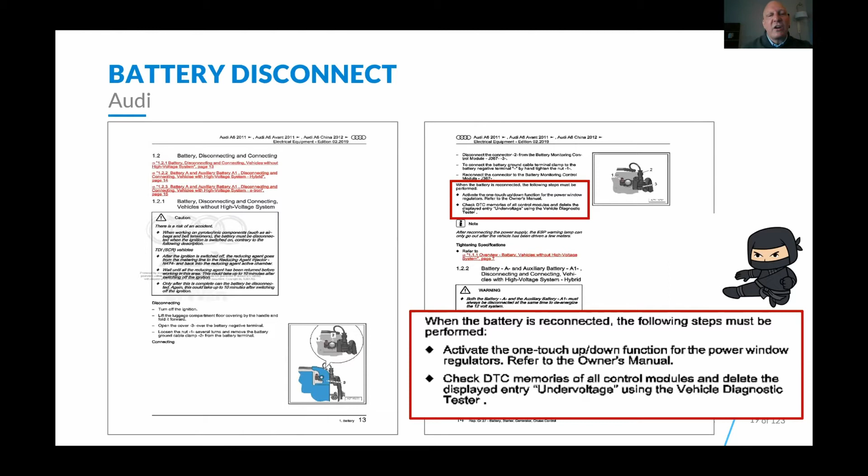Look what Audi says. When the battery is reconnected, the following steps must be performed. Activate the one-touch up and down function for the window. And check DTC memories of all control modules and delete the displayed entry Undervoltage using the vehicle diagnostic tester. Right there says I got to hook up a scan tool, and I got to clear all of the lost communication codes. And by the way, for those of you using aftermarket scan tools, you're not going to be able to do this. That's why you need to use OEM scan tools. So for those of you that have disconnected 1,000 batteries, did you know Audi has a very specific procedure? Let's look at General Motors right here, on a Chevy Cruze.

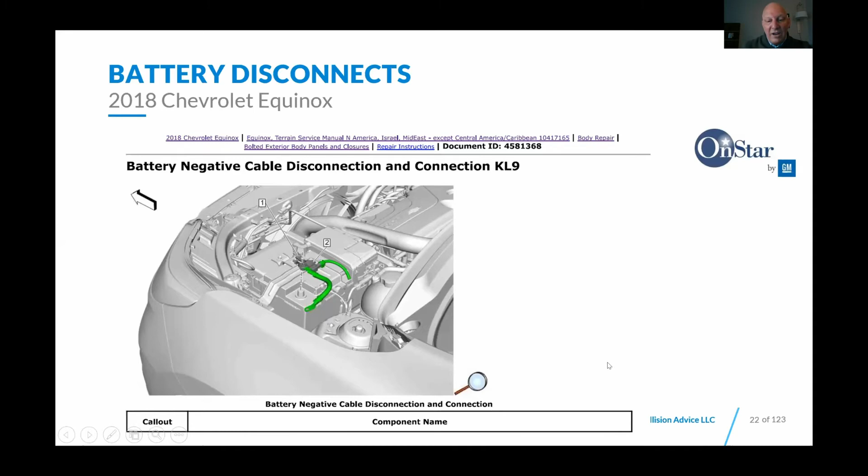Look right here. This is Chevy Equinox. Look at this one right here. Now, this one has OnStar on it, right? This Chevy Equinox has OnStar. And look what it says right here. It says if the vehicle's equipped with OnStar, there are certain things you need to do before you disconnect the battery so you don't trigger a call from OnStar where the vehicle owner ends up getting a bunch of emails saying there's a problem with your car. And if you don't do this properly, guess what? You might end up having to buy a backup battery because when you disconnected it, it goes to backup battery mode, right? So if the vehicle was in an accident, the battery got damaged or the wire got cut, it could still notify OnStar. So are you looking that up?

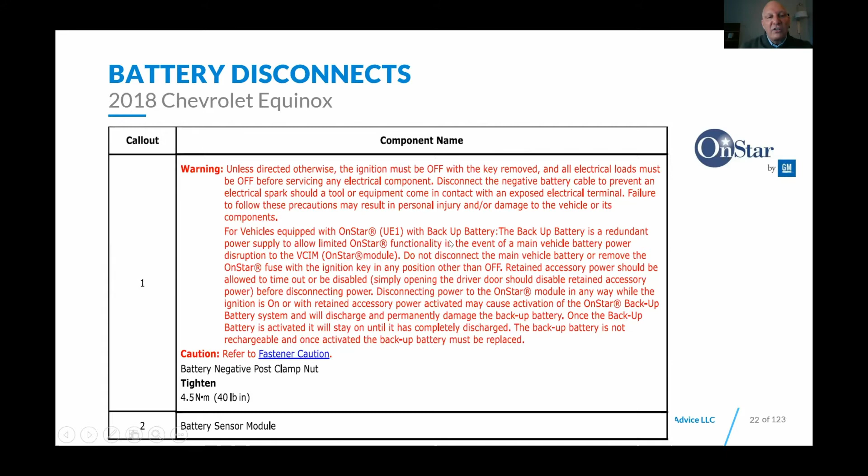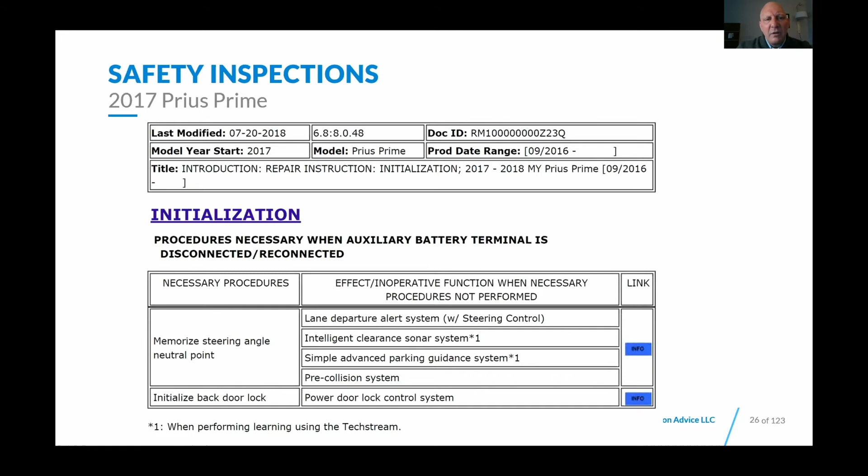But can you imagine how a body shop feels or an insurance company feels when all I'm doing is replacing a bumper cover and I got to disconnect the battery and I put something on my estimate and it says initialize back door lock. And now some insurance appraiser is wondering, why do you got to mess with the back door when all he gets is a headlight and a bumper cover? Because, ladies and gentlemen, it's what happens when we disconnect the battery. Here's what I'm trying to tell you. Even something as simple as a battery, which we have for years disconnected, reconnected, you got to research that.

Now, here's what I'm going to tell you, right? Ladies and gentlemen, we've got to start thinking about the OEM repair procedures like building codes. I'm sure that all of you are familiar. Like if you go to build a building, in Canada, Patrice, I'm sure there are certain standards you have to meet, right? Like you go to build a building and somebody has to come in and do an electrical inspection. If you're going to put a lift in concrete, your concrete needs to be 6 inches or thicker, right? If you live in Florida, the building code is you got to have certain types of windows that are hurricane proof. If you live in Montana, there's certain types of bolts and fasteners you need to use on a roof so it will support the weight of the snow.

Ladies and gentlemen, here's the deal. OEM repair procedures are the building code for what to do to a vehicle that's been in an accident. Think about building codes. They're to provide minimum standards to protect people in the case of a fire or an earthquake or windstorm or whatever. And they ensure the structural integrity so a building doesn't collapse.

Ladies and gentlemen, I got to tell you, first of all, I am very, very grateful to the people of Canada because when September 11th happened in the United States, so many people in Canada took Americans into your homes and your businesses because they couldn't get back across the border.

And that was a tragic day for us in United States history, right? But here's the deal. I can tell you that at the Pentagon, not as many people would have survived when the planes hit the Pentagon had it not been built to code. And ladies and gentlemen, we've got to understand that every single time we repair a vehicle, we have to return it back to code. And the OEM repair procedures are the standard.

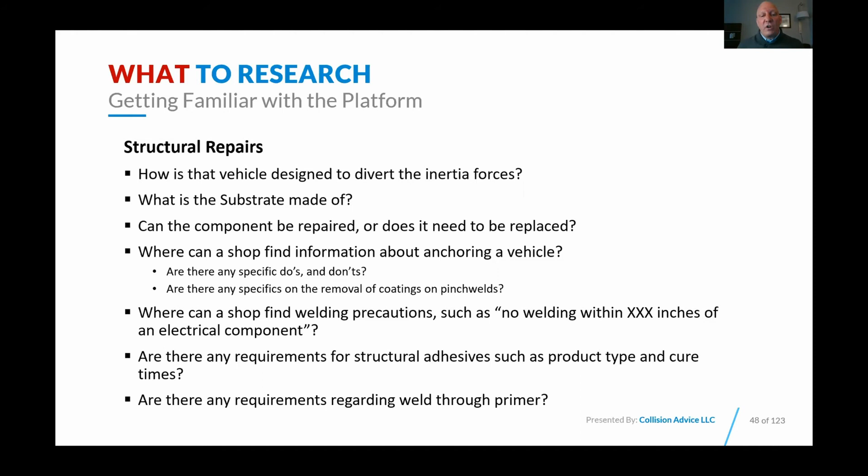And then I need to look up things like how can I properly anchor the vehicle? Do I need to remove all the undercoating and seam sealer off the pinch welds? We might got to look up any welding precautions, like no welding within 18 inches on a Toyota or Lexus, but no welding within 12 inches, which I think is 300 millimeters, on a Fiat Chrysler vehicle. We got to find out, is structural adhesive used anywhere? And if so, what's the cure time? And are there any requirements for weld-through primer?

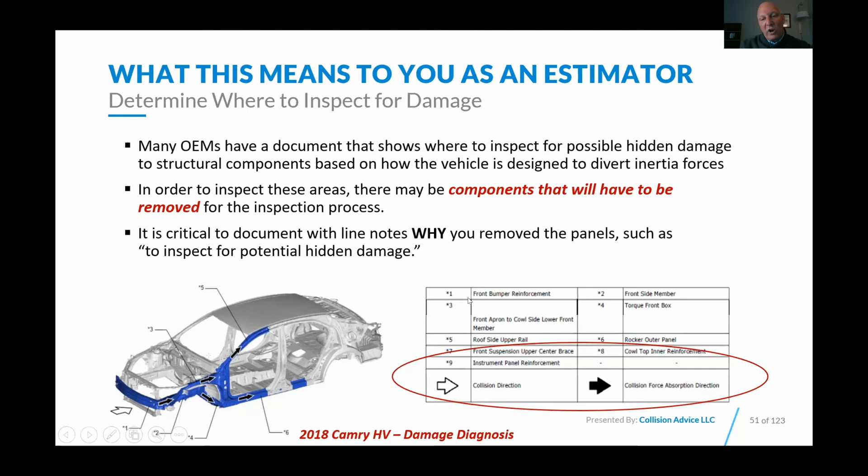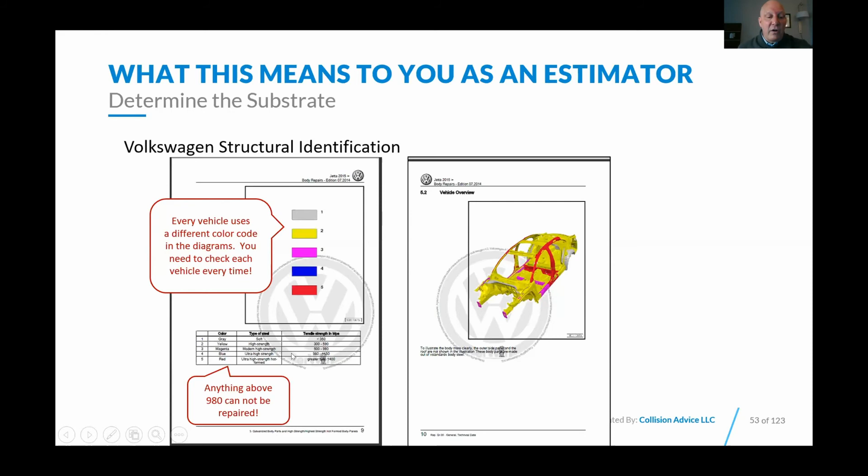All right, so now I go through and I find damage. The next thing I do is find out what the substrate is made out of. For example, I go into Volkswagen's erWin, it's color coded. Here's what every substrate is made out of. And I know I can't repair anything 980 or higher. So now I know I got to replace this. I can't repair it.

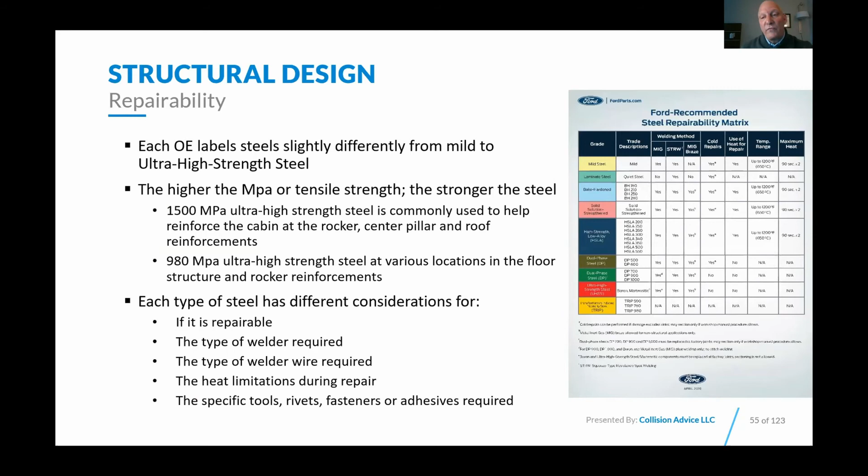So how do I find out if I can repair or replace? Some of your OEMs like Ford, Honda, and others are going to have these matrices. They're going to tell you if the part can be repaired or has to be replaced. And if I have to replace it, now I'm going to look up my sectioning procedures. So there's a whole thought process on how I'm using the OEM repair procedures, right?

Now let's talk about electric vehicles a little bit. Tracy, I know that you were an electric vehicle owner. You had a Prius, I believe, right?

Electric vehicles are becoming a growing market share. You must look up your refinish precautions. Look right here. I want to give a shout out to Scott with Audi up in Canada because he taught me this. Is there anything special to do when an Audi high voltage vehicle must be brought into the paint shop? Yes, it cannot exceed a certain temperature for a certain time in the spray booth.

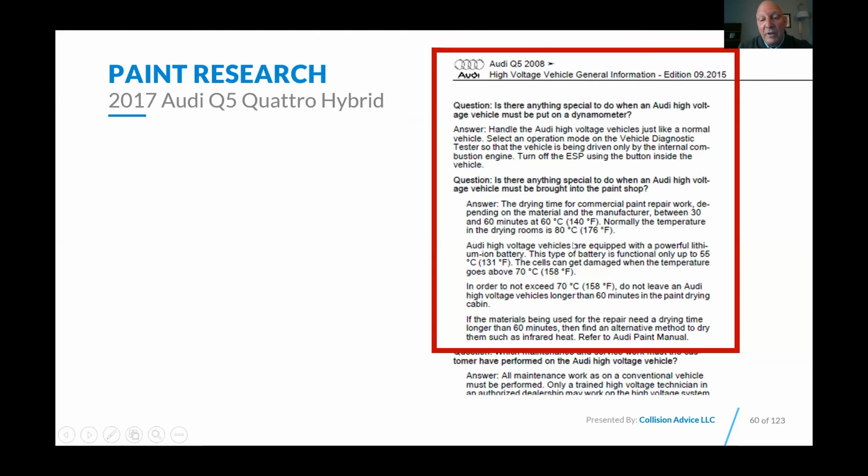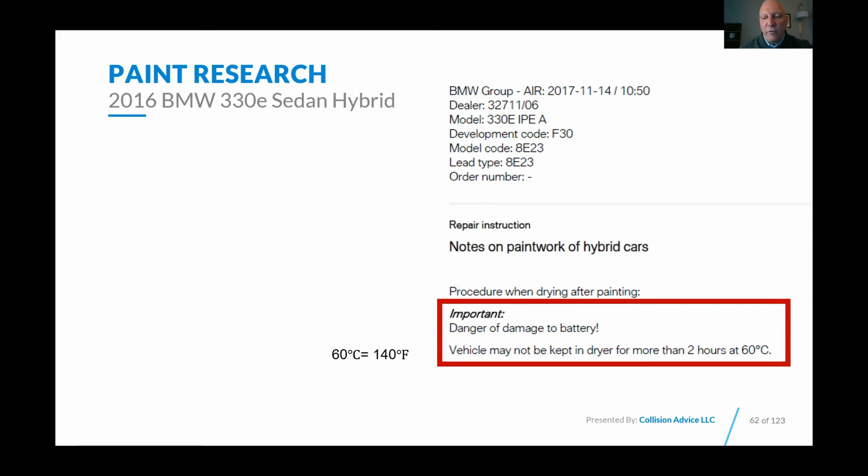Let's look at an Acura. High temperatures may damage the battery module. When drying paint in a heated paint booth, make sure the temperature doesn't exceed 65 degrees Celsius. Look at BMW: the vehicle may not be kept in a spray booth or dryer for more than 2 hours at 60 degrees Celsius. Look at a Chevy Volt: can't exceed 60 minutes at 160 degrees Fahrenheit or 71 degrees Celsius. It'll damage the battery.

So what I got to do is check the temperature on that, and I'm going to have to remove my rocker cover so I can actually check the temperature on the metal rocker panel. Here's a Porsche, ladies and gentlemen. They have a very specific cure time and temperature.

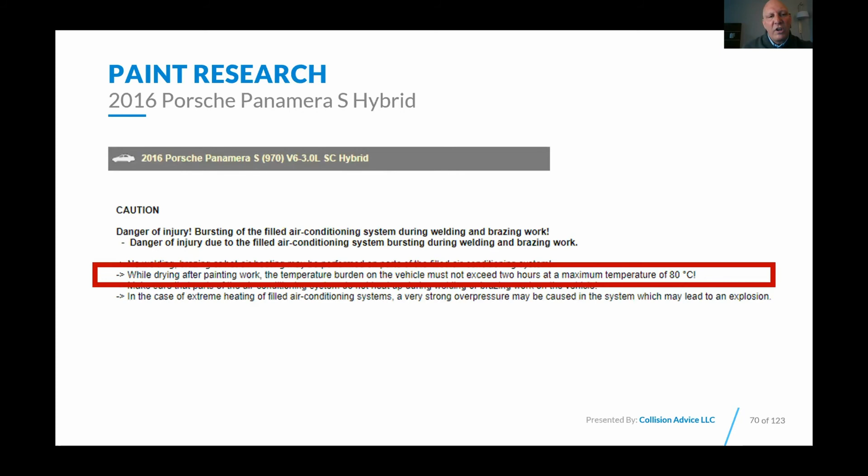Here's the next thing. Remember, I told you one of the biggest differences is between an OEM website and the aftermarket providers. You've got to know if the vehicle's connected to telematics. If so, you've got to place that vehicle in service mode before you disconnect it or take it apart, or it's going to send the customer an email.

Here's the problem — if you're using some of these third-party solutions, it will not tell you this. And if you don't place it in service mode, your customer is going to get email notifications. In some places, you may activate the backup battery, and that's a one-time use part, so now you're buying that. As more and more cars are connected, we're going to have to research OEM websites because we need to know this information. Let's talk about safety inspections.

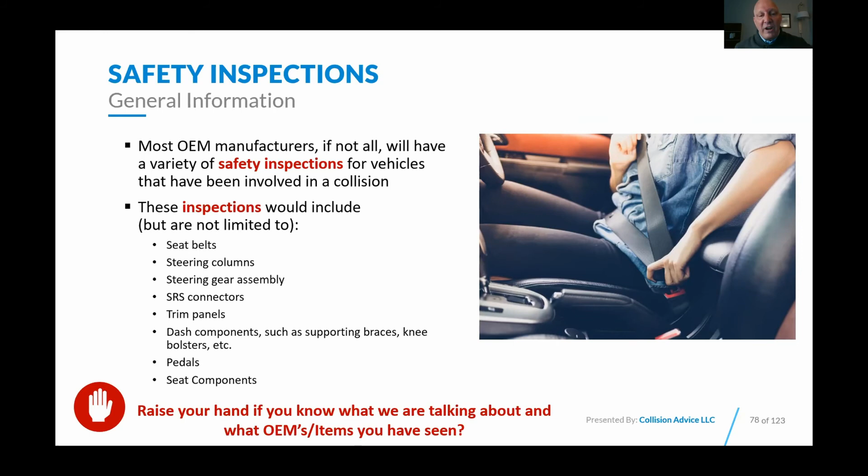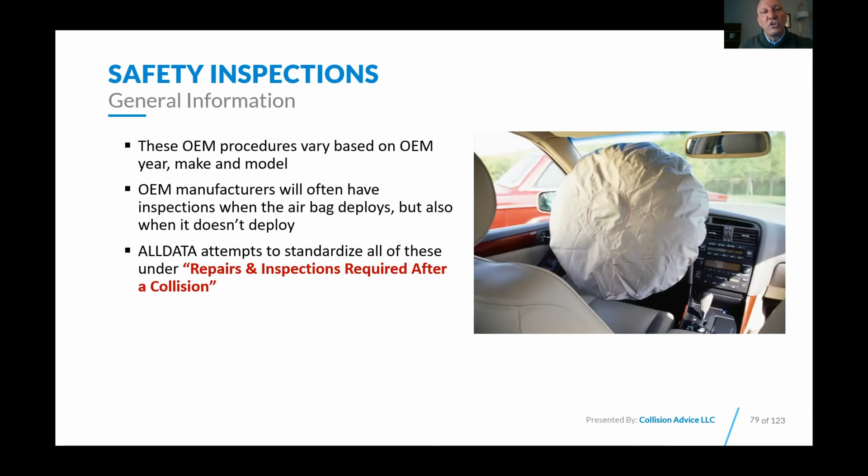Ladies and gentlemen, I can tell you right now if you were in front of me, I'd say give me an amen if you know what I'm talking about. Let me give you some examples. By the way, these OEM repair procedures for safety inspections will vary based on OEM year, make, and model. This is one of the benefits of using ALLDATA — it attempts to standardize this under repairs and inspections required after a collision. That's a good thing from ALLDATA.

Let's look right here, let me give you an example. This is a 2018 Chevy Silverado — these are actual pictures from a friend of mine, Tim Papp, who owns a body shop called Papp Auto Body in Illinois.

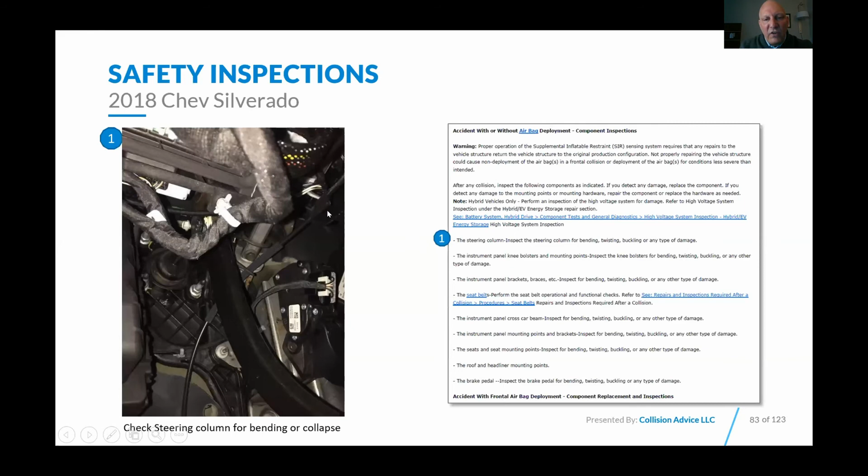When you research the OEM repair procedures on this Chevy Silverado, the first thing it says you need to do is inspect the steering column for bending, twisting, buckling, or any type of damage if the vehicle's been in an accident, even if the airbag did not deploy.

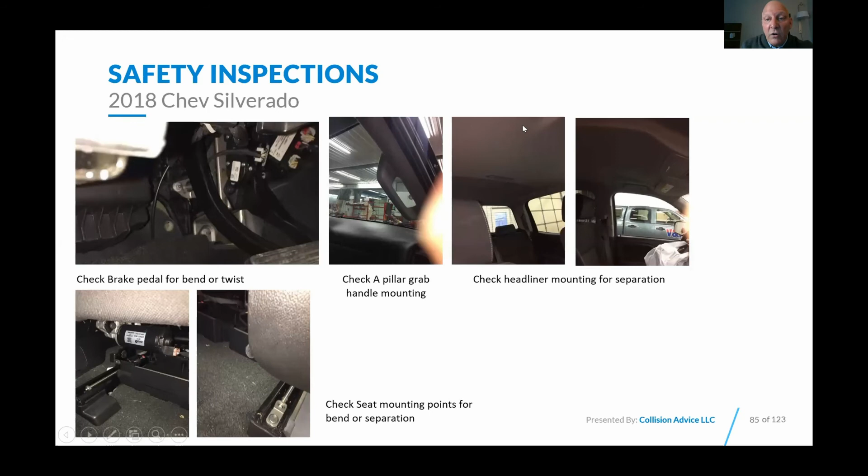What does it tell me I need to do, ladies and gentlemen? It tells me I need to check the brake pedal for bend or twist. It tells me I need to check the A-pillar grab handle. It tells me I need to remove the headliner and look at the headliner mounting locations. I need to look at the seat tracks. I got to look at the seat belts. And guess what else it tells me? It says I need to R&I the dash and inspect the dash carrier.

Well, guess what? It's a good thing Tim Papp did that. You know why? Because look right here, the dash carrier was broken. Think about if he would not have done that. He never would have found this.

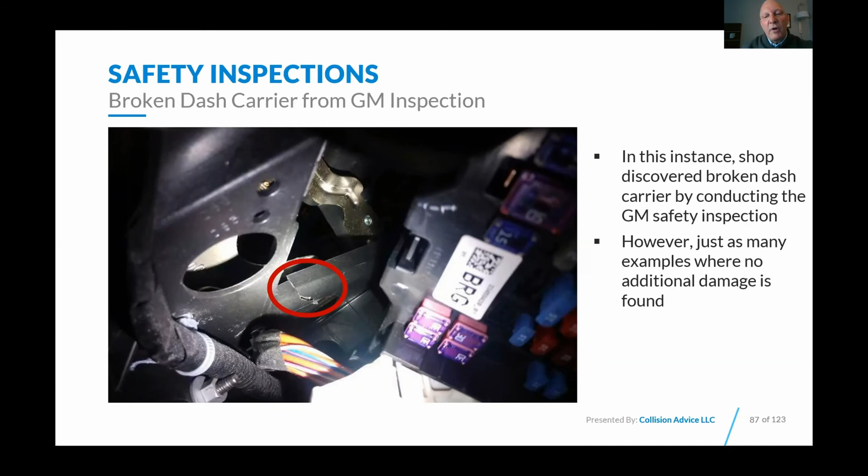And that's why I'm saying there's a pandemic in our industry that is greater than the coronavirus or COVID, and that's people not researching repair procedures. It scares me to think about how many GM products are riding around with broken dash intrusion carriers because nobody did the work.

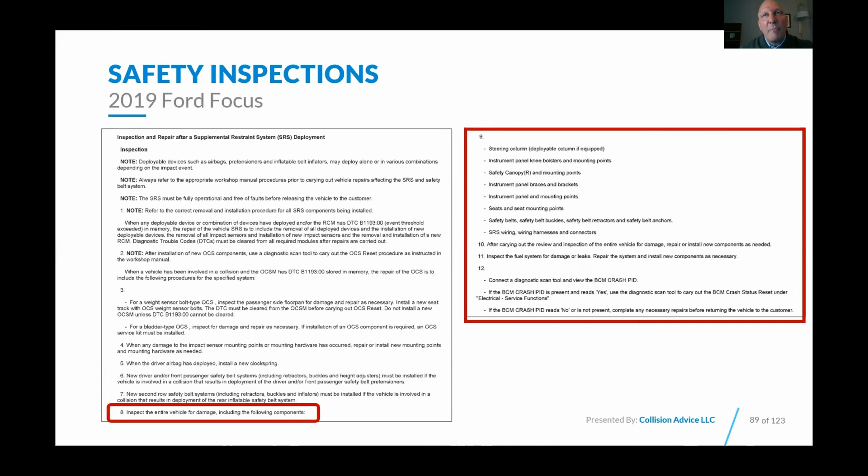Look at Ford. Ford says, look at all the things you got to do if a Ford is in an accident. It says if it's in an accident, even if the vehicle airbag does not deploy, you need to inspect all of these things. Mercedes-Benz has examples of things you need to inspect.

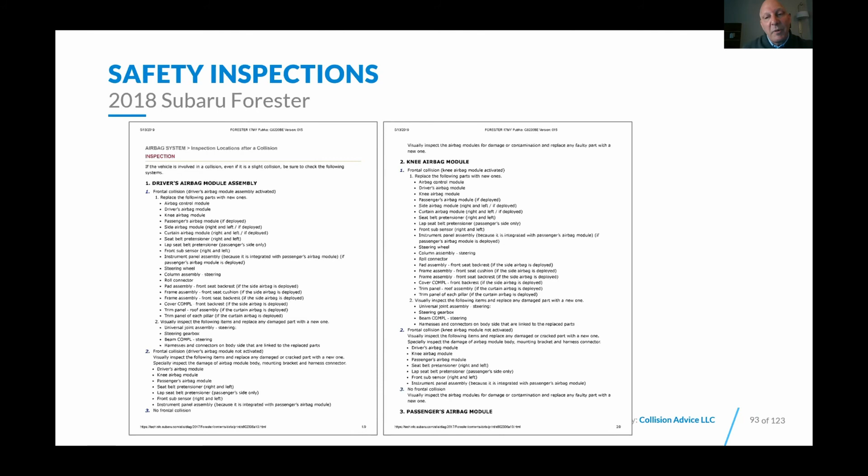Look at Subaru. Check this out. Subaru says if a Subaru's in an accident, watch this, everybody. Watch this now, stay with me. 1-page, 2-page, 3-page, 4-page, 5-page, 6-page, 7-page, 8-page. There's an 8-page document of things I'm supposed to look at and inspect if any Subaru's in an accident.

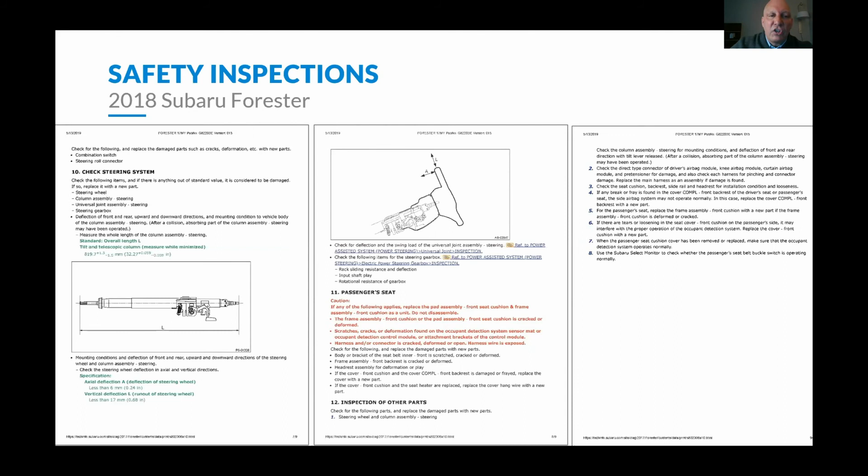And let me tell you about a little case study we did with steering columns. I'm going to tell you about that in just a moment.

Let's look at Toyota right here. Toyota says, look, if the vehicle's in an accident and the airbag did not deploy, here's all these things that you need to inspect. All these SRS connectors, seat belts, steering columns, right?

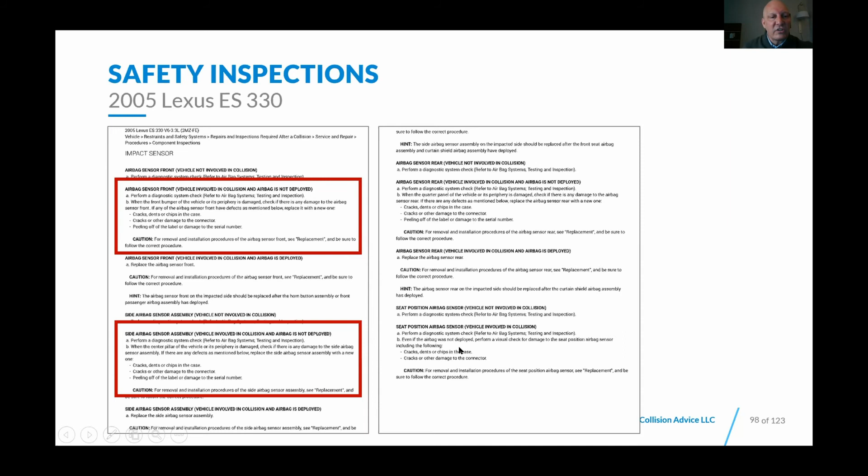Toyotas and Lexuses. Let's look at seatbelt inspections. Look what Audi says, right? Here's on an Audi and a Volkswagen. It says that after every accident, seatbelt systems need to be checked. It tells me here's all the things I need to check, and it tells me I need to do a test drive at different braking conditions, a minimum of 5 times.

Look at Fiat Chrysler right here. Fiat Chrysler says I need to inspect the seatbelt and I need to inspect the child restraint latch system. This is on a Dodge Ram truck.

Nissan Infiniti right here, need to inspect the seatbelt. There's a visual inspection, and I also have to use the scan tool to make sure the pretensioners aren't collapsed.

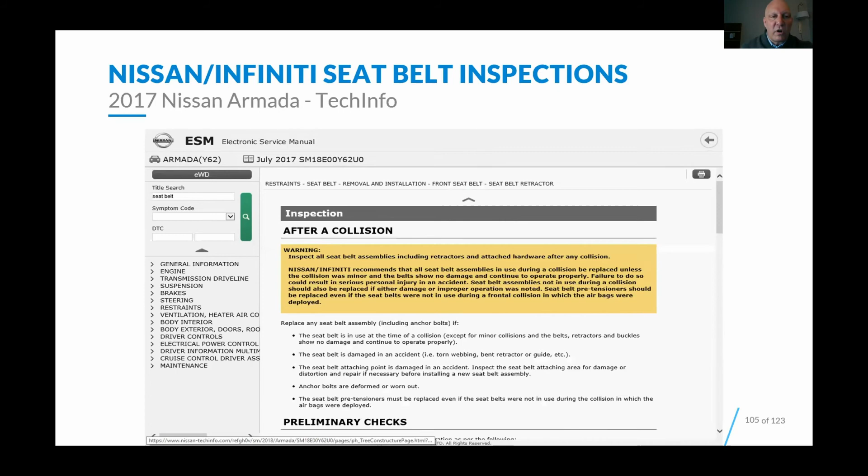Here's Porsche, right? After any accident, the seatbelt system must be checked systematically for proper function and damage. And it tells me how to check it, ladies and gentlemen.

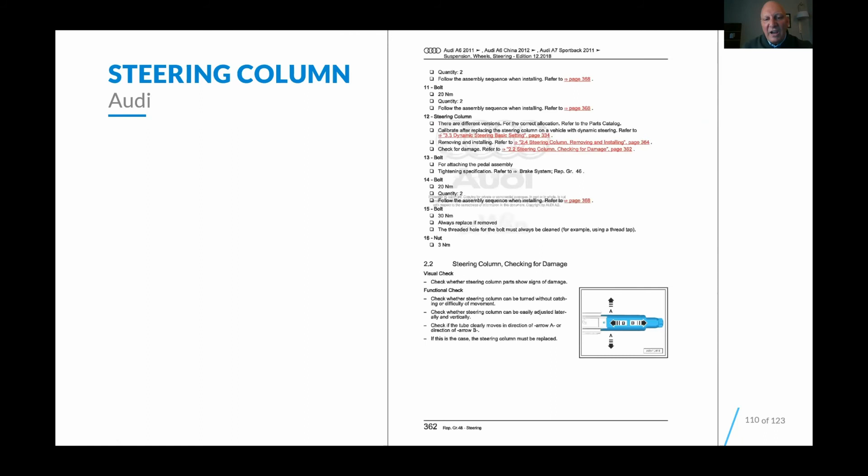Let's talk about steering columns. Here's an Audi. Audi says if this specific Audi right here is in an accident, it tells me I need to actually do a visual and a functional check of the steering column, right? Hyundai has an inspection process on a steering column. Nissan Infiniti has an inspection process on a steering column.

Look at Subaru. Subaru says I need to check the steering column. I need to measure it. And there's a very specific procedure.

Let me tell you about a case study we did with a shop. We measured 43 steering columns on Subarus, and 11 of the 43 were collapsed.

That's 26%. Let me just tell you right now, do you think that's acceptable, ladies and gentlemen, that people are not measuring these when we have a 26% rate?

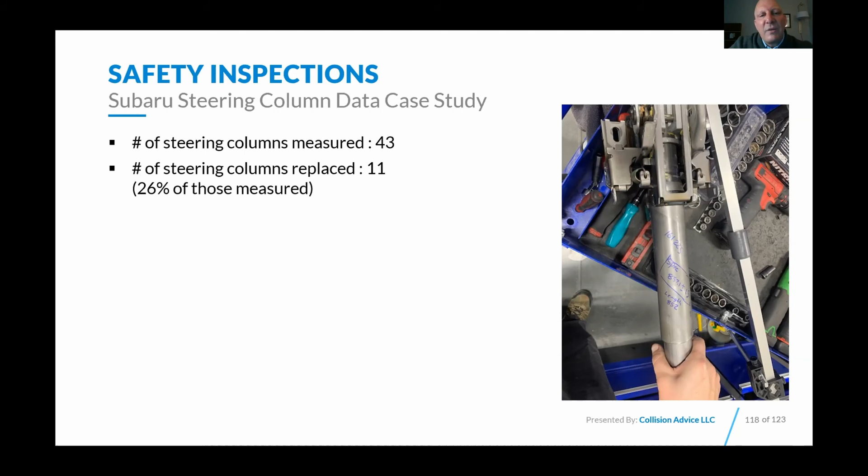And why do a lot of these steering columns have to be measured? I'll tell you right now, because they have a plastic collapsible bushing in there that, based on the inertia forces, collapses so the steering wheel doesn't crush the sternum on the driver. It's designed to protect the passenger or the occupants. Ladies and gentlemen, we don't know what we don't know.

So let's talk about some other final thoughts. You need to save your OEM repair documentation. Why? Because things change. Now there's several ways to change these, but here's the deal.

The worst thing in the world is you end up in court or a third-party payer audits you and says, why did you replace this part? Well, here's the document that says this part, this date and time, was a one-time use part, or this is how I was told to replace that part, even though they came out with a sectioning procedure. Save your OEM repair documentation every single time because things change.

Now Tracy, what about if we can't find what we're looking for? We're in AllData, we're in Toyota's TIS or Volkswagen or Audi's erWin, we're in a factory website, and we can't find what we're looking for. We can't find a sectioning procedure, we don't understand something. Tracy, what options do we have?

Yeah, you definitely have some options. So you can always reach out to your OEM dealer, see if they're able to help you with the procedure. Many OEM sites have some sort of feedback button or feedback form where you can send them information about what you're looking for, or if something's incorrect, they like that too.

You can always, if you're a certified collision center, usually there's an email or a phone number or a third-party company that does the auditing, like Verifacts or Summit Consulting, that you can reach out to. Some even have a hotline. I know Nissan has an Identifix hotline where you can call up and speak to a certified technician on the other end, and they can help you with a repair procedure. There's always Ask I-CAR where you can get information as well. So there's lots of options if you can't find what you're looking for.